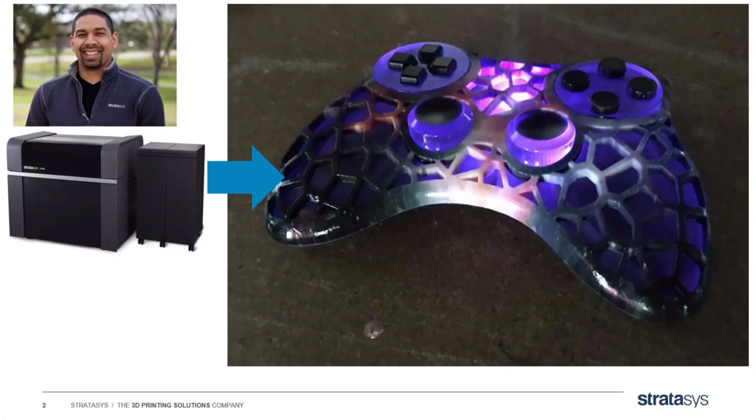So my job at Stratasys is when people get their new advanced multicolor machines, I go in, I'm with the software team, and I help them make sure they can get the output, the realistic prototype output they want out of those machines. So I help them get that end result. But every time I'm in, helping people set up their processes and going through, they always ask me the same question. They ask me, how realistic can my 3D printed parts get? They ask me, what's the most realistic part we can print? And sometimes this is the wrong question.

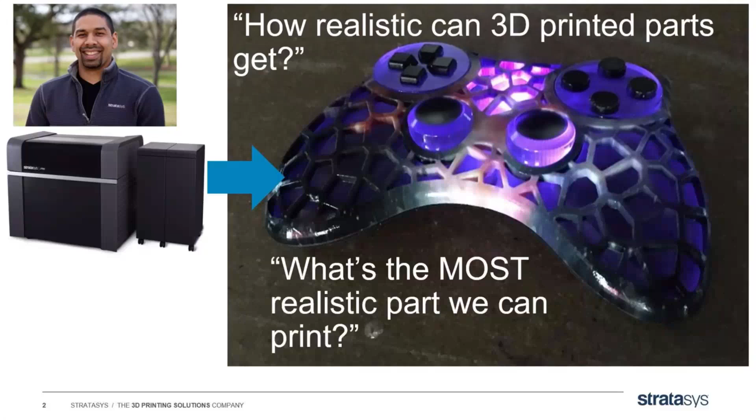Because here's my first rule: the only reason to 3D print a prototype is to make a design decision. And typically, it's your very next design decision. So the question I ask folks when they want to decide what to print is: is this print realistic enough to make your very next design decision?

And that leads to kind of a gradated levels of 3D printing, which I'm going to go through here. So imagine you guys were a small, industrial design firm, and you're trying to come up with a design for the next new hot game controller, like a PlayStation controller, an Xbox controller. You want to leapfrog ahead, and you need to pitch this idea to someone like Sony or Xbox or something like that.

Everything I'm going to go over here, I've written a tutorial on earlier on, so if I'm going too fast here, don't worry about it. It's all written down on the web. Go to GrabCAD.com, you can search for the tutorial. If you go to Google, just Google how to 3D print realistic prototypes, and I'm the first video that comes up. So don't worry about taking detailed notes. All the little steps and tricks are recorded online for you at any time. And also, Javelin is recording this, so you can always play it back again.

But let's go back to that design firm. Okay, so you're trying to come up with the next new video game controller prototype. You've got some ideas. And what I'm using as inspiration are my own PlayStation controllers from home. So this is what they look like from home. This is what we're going to try and get and go beyond.

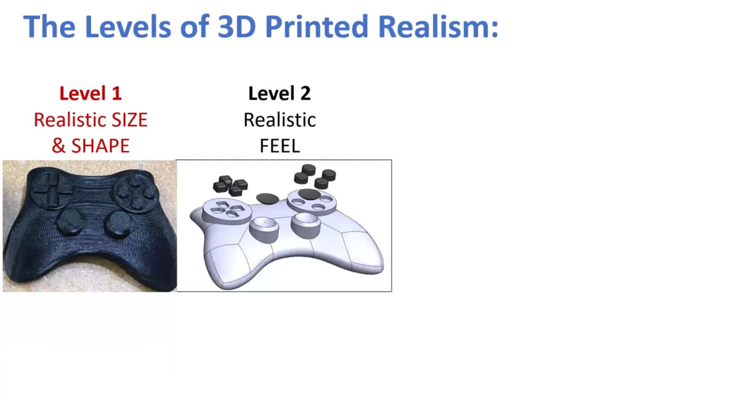Going one level higher, now you've got realistic feel. You can see we're going to do stuff with those buttons. We're going to make those buttons soft as we make the rest of the print out of a hard plastic, and we'll make them feel like buttons, get a realistic feel. Going even higher, we're going to add colors. Okay, now you're going to talk about matching the right color, Pantones, things like that.

That's a higher level of effort and result. Going even one level higher, I call it realistic everything else. Each of these levels is a quantum jump in effort and realism.

What do I mean by that? In the first level, what do you need to make this happen? You just need a CAD file and any kind of printer. I put FDM printer here because that's what I'm using, but really any printer will work. You're just trying to get the shape of the thing.

Going to level 2, now you have to add a PolyJet printer. You have to print in multiple materials, a hard and a soft material at the same time, and have them fuse together during the print. So now you need a multi-headed printer.

Going to level 3, now you need some sort of software that outputs color. VRML, OBJ, the new format 3MF. Now you need a software that can do that, not just a CAD software maybe.

Going one level even higher, now you're adding magnets and light and polish and even cornstarch. I'll talk about the cornstarch later. But you're going, again, another level of effort, another level of time.

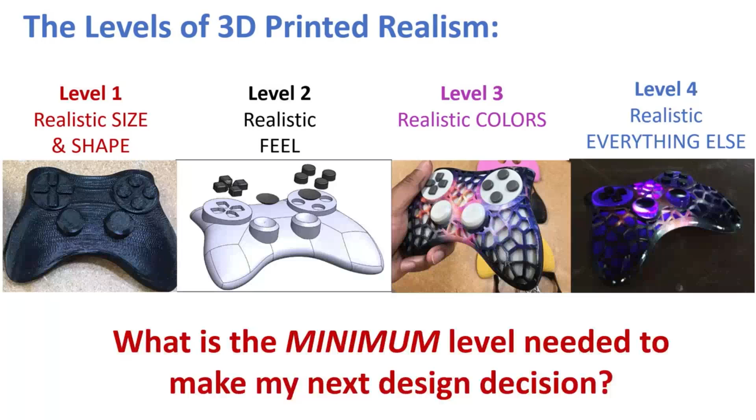So as you're going through and designing your consumer product parts, you have to ask yourself, what's the minimum level you need to make your next design decision? That'll make you efficient and that'll save your time. All right, so let's go through these different levels. You guys ready?

Level 1, size and shape. When I started out, I used SolidWorks. You can use any sort of CAD system for this. I'm a SolidWorks person, I've been trained in SolidWorks for 10 years. So I made this model quickly in SolidWorks in 10 minutes.

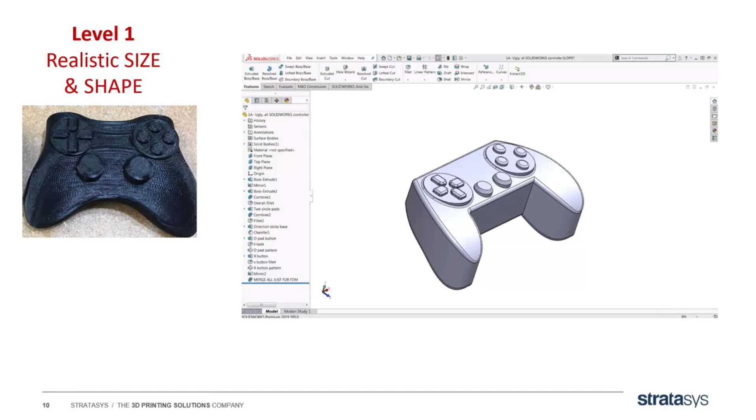This looks like the old Nintendo controllers we had when we were a kid. It looks pretty good on screen, looks like my hands would fit around it, right? But the instant you print it out and pull it off the tray, you can tell this is a bad fit. It just feels clunky in your hand, it hurts, it doesn't fit right. You can tell within 2 seconds of holding it, this is a bad design.

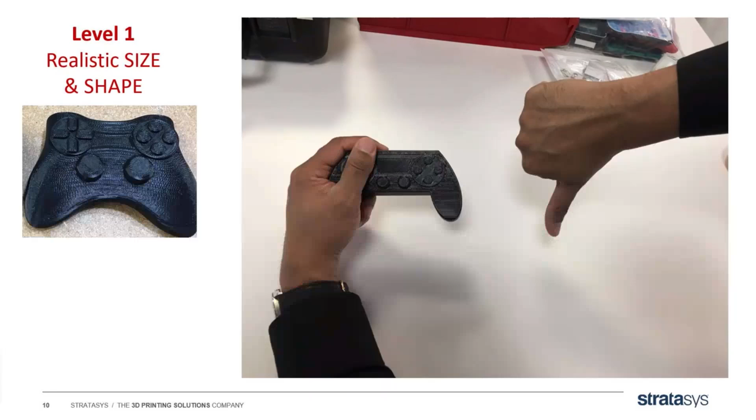So I went back to SolidWorks, and now I used the power surfacing feature. If you guys aren't using the power surfacing add-in, it's a great little add-in for consumer product design. It lets you do sub-D modeling and then add your SolidWorks mechanical features after that.

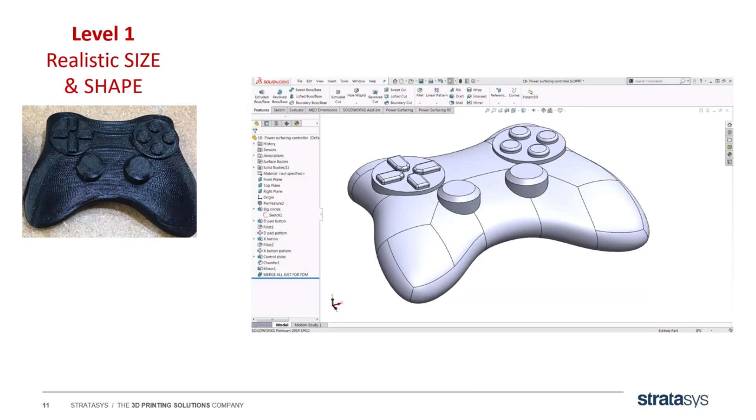So I did some sub-D modeling. I came up with this, and when you print that out, you can see, if you can see in the little tiny screen here, it fits really, really well. It cups to your hand, the buttons are all in the right place, it's exactly the right size. So this one works, and you can find that out within 4 seconds of holding the print.

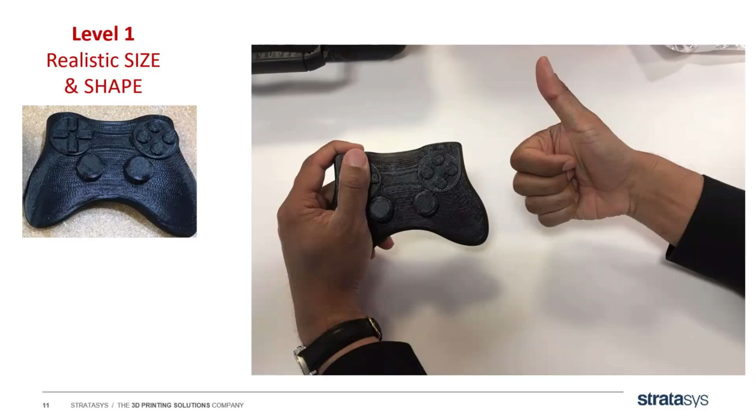But here's the trick for level 1. I didn't print one version and then the second version, I printed them both on the tray at the same time. And that's my rule for level 1: print more than one size and shape at the same time.

You don't want to do these in series, wait 3 hours, make a decision, wait 3 hours, make a decision. You want to do these in parallel, okay? That's more efficient, it won't affect the print time that much. An overnight print is an overnight print, and it will let you make a bunch of decisions really fast. You can tell what's not going to work right away.

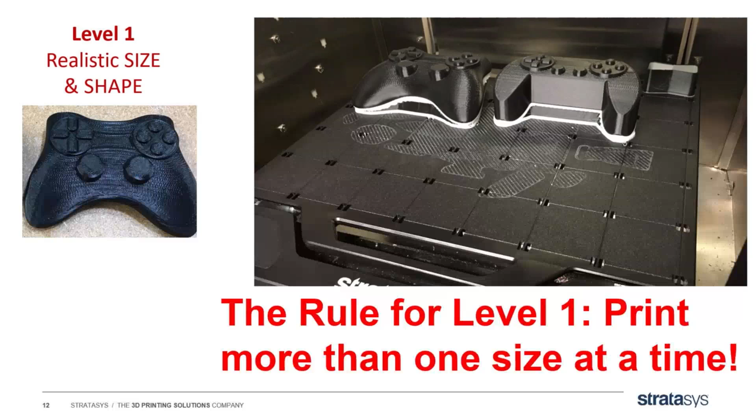Previously, I was printing out a cell phone idea. We had an idea that if you put bumps on the back of a cell phone, you could kind of hold it better for gaming, kind of like those pop sockets that people use.

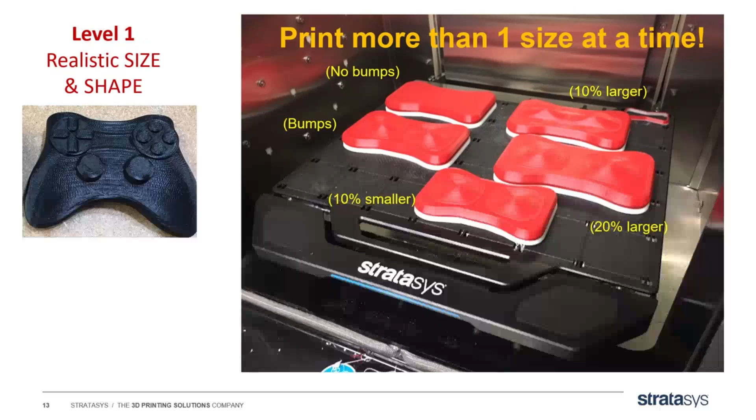So that's my rule for level 1. You're trying to figure out the size and shape of your part, just the general outline. Just, will this idea work? Print more than one size and shape at a time. It doesn't really affect the print time, and it really cuts down your design time.

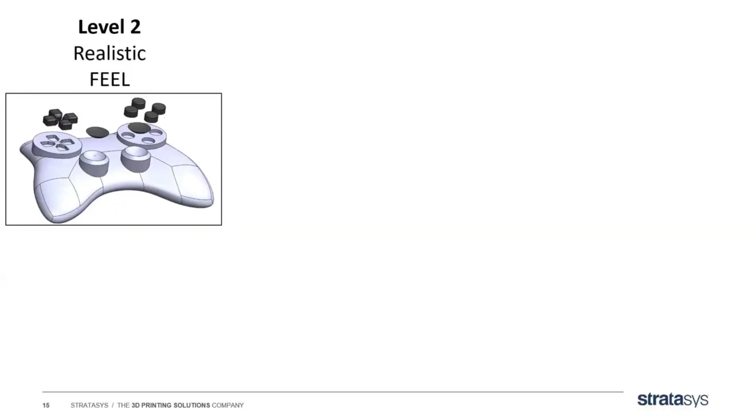Now we're going to go a little bit higher and go to realistic feel. So this is an image I stole from Teknor Apex. You can see their website down below. It talks about shore hardness. Some of you guys may be familiar with it, some may not.

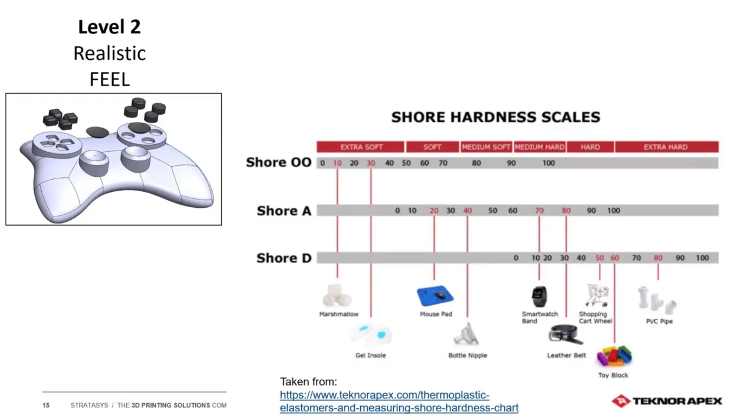For our PolyJet machines, we have colors called Vero. Vero is our brand name, and those Vero colors are about shore 80 or shore 80D, so they're about as hard as a PVC pipe. We also have white and black, which are pretty hard. But we also have colors called Agilus, and Agilus are shore 30A. We have white, black, and clear. Pretty soft, between a mouse pad and a bottle nipple.

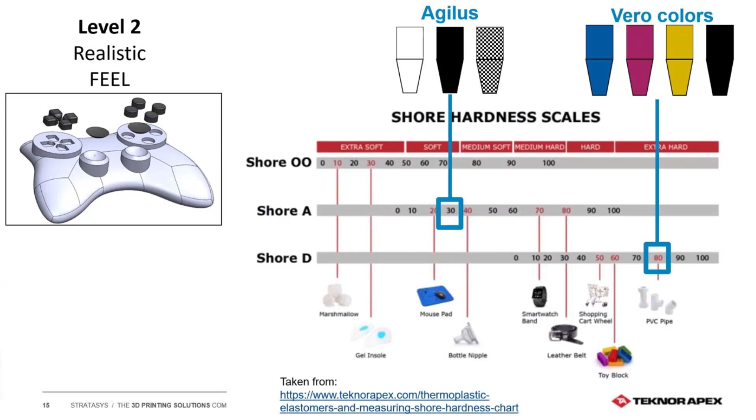So one way to approach level 2 is, for this controller, you're going to print the buttons in shore 30A, nice and soft, and print the body in shore 85D. That's the very basic level of feel. You make it a multi-body in SolidWorks. The bodies just have to touch. There's no special thing you have to do with the PolyJet printer. As long as the bodies touch face to face, they'll bond during the printing process. But this is the very basic level.

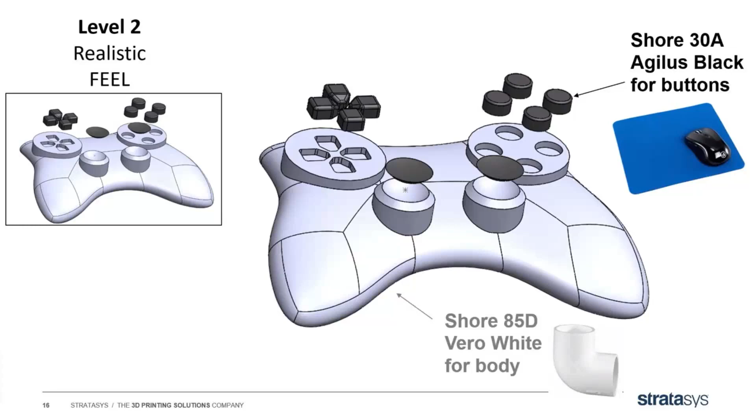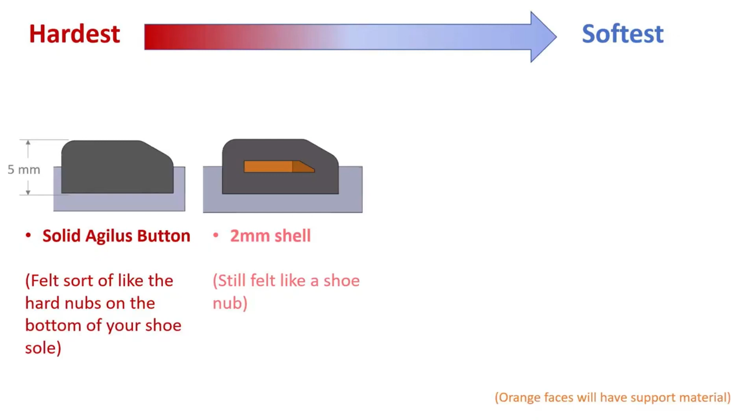One of these tricks is they make the part hollow. This is a shell feature in SolidWorks, just a simple 2 millimeter shell. Anything that's orange will have support material on the inside, and we don't have to wash the support material out. The support material makes it squishy, so that's a little bit softer. It still feels like a shoe.

But if you make a 1 millimeter shell, this feels soft when you give it a firm push. It feels pretty good. And then you have the unsupported shell. This is really soft, feels like the nub on a stylus, very flimsy, right? So you can dial in, you have that one shore hardness, but you can dial in what you're doing to make it feel harder or softer.

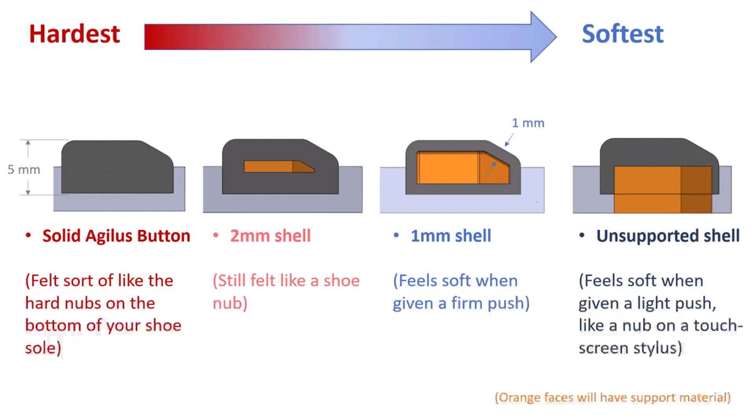So just like level 1, you don't print just one of these at a time. I did a 1-hour test print, and you print a bunch. Here's some solid buttons, here's some different hollow buttons, some unsupported buttons. I just want to see what they feel like. Again, we're testing ideas, we're trying to find out what doesn't work.

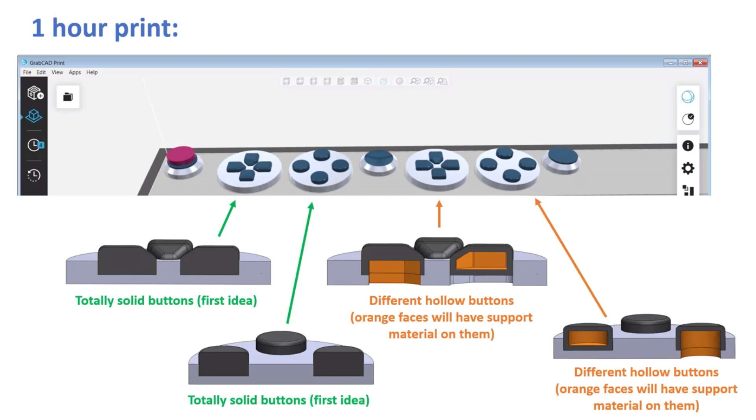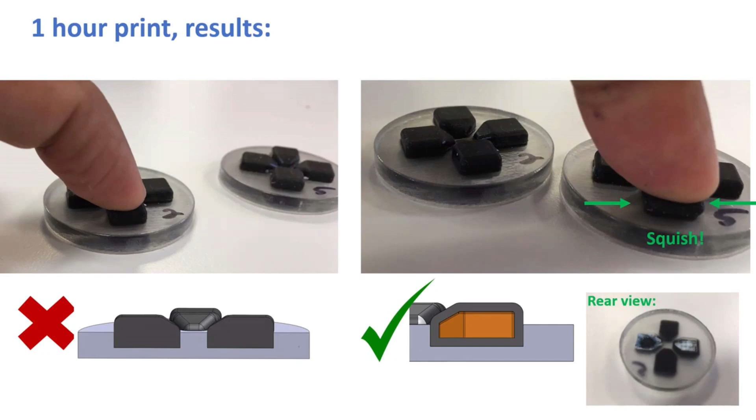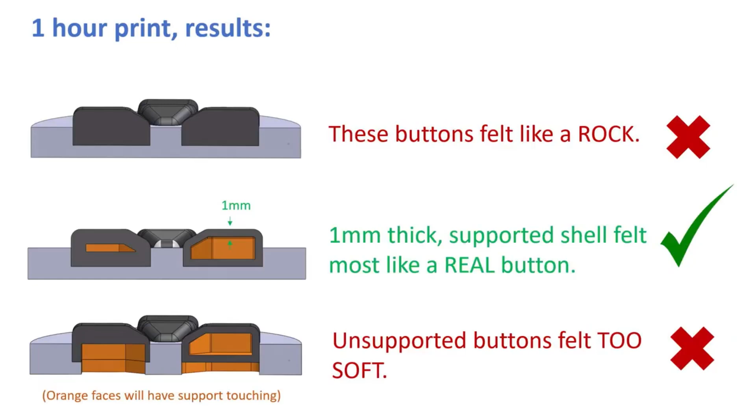So here's the results. The solid buttons, like I said, felt like a rock, no squish. But the hollow buttons with the 1 millimeter shell, they felt like a squish, and they felt like a real button. You can see the rear view, the support material on the back there, the unsupported ones. So here's the results: too hard, too soft, but this in the middle is the Goldilocks zone, right? For the application I'm doing, it felt most like a real button to me.

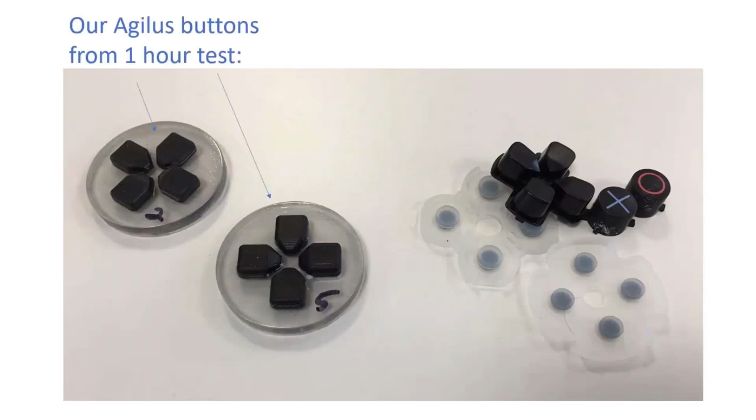And why are we doing this? Because if you look at the buttons we printed on the left, here's what we actually printed in the 1-hour test, but here's what the actual controller looks like. I bought a used controller and took it apart to show what it looks like. In the actual controller, you've got hard plastic buttons over a very thin rubber spring, less than 1 millimeter thickness spring.

But my buttons are relatively thick, so I didn't try to match one for one the exact geometry of what's going on. We're using a different process, a different style of printing, a different CAD file, but I just had to have something that felt close.

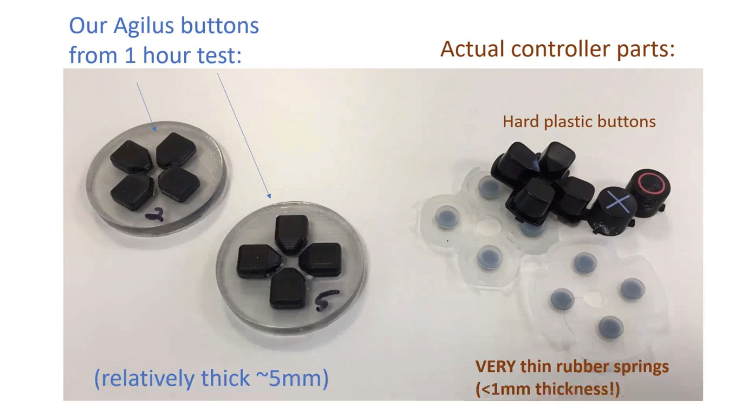So I tested it in a little one-hour print. Then I printed an actual one, and it felt pretty good. Here's the actual one right here in the corner of my screen.

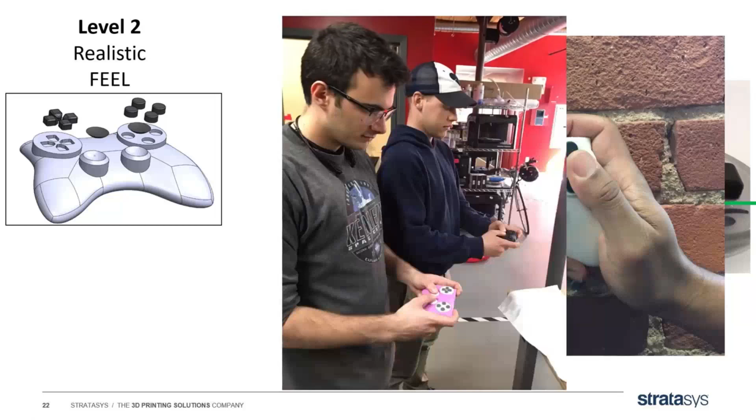And then I had live testing. One of my coworkers said, man, this feels close enough to test. My other coworker said, this is better than the one I have at home.

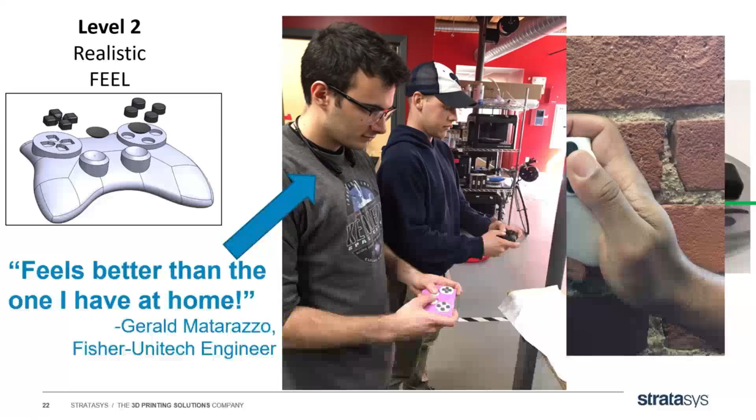So you can dial in this feel based on some tricks with geometry and infill. That's my rule for level 2: it doesn't have to be exactly real to feel real enough. The buttons as they are, real enough to take to someone and say, look, this is the next control we want to make, do you like it? That's enough to get it past that executive. We don't have to go all the way and make tiny springs over hard buttons.

You could if you wanted to, but you're trying to do things fast. You're trying to be the first to market. Try and just test out this idea.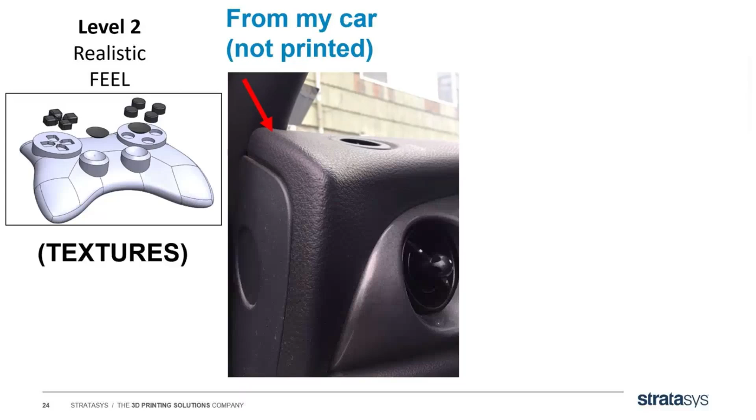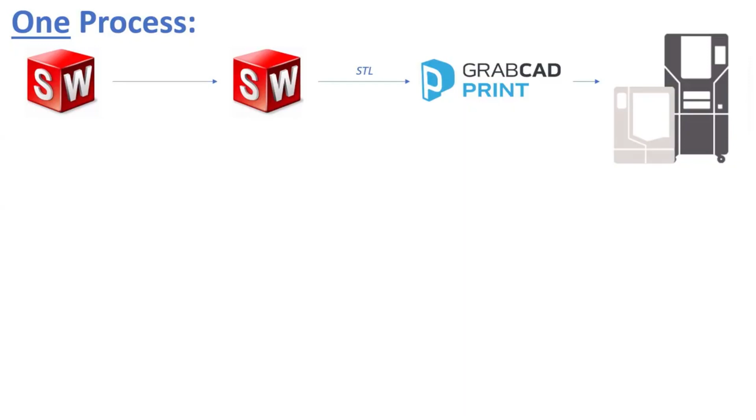So I made a similar part in CAD. Again, I love using SolidWorks. Here's one way to put textures -- lots of other programs have different ways. You can do it in Photoshop, in Rhino, in 3-Matic. Here's one process: I put different faces in SolidWorks, isolating them using the split face command.

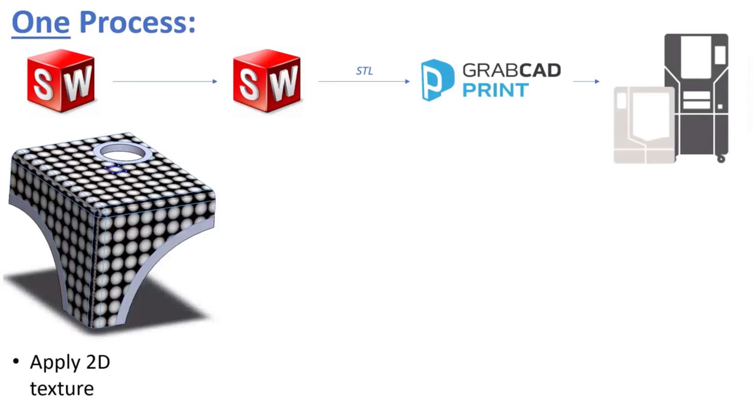I applied a 2D texture, just a black and white texture, and then applied a 3D texture in SolidWorks. This is a feature new in 2019 -- it lets you actually bump and displace the part and make an STL out of it. You lay it out in GrabCAD just like you normally would, and when you print it, that's the result.

The picture in SolidWorks shows circular textures -- that was an earlier version. The red picture is actually hexagons; it was my third or fourth iteration. It came out really well -- the texture wraps around the fillets. It feels really nice, makes it look very realistic and not like a 3D printed part. So that's the one I'm showing here.

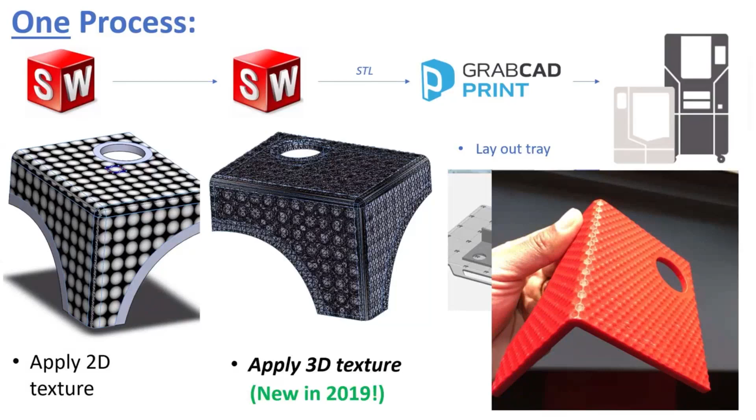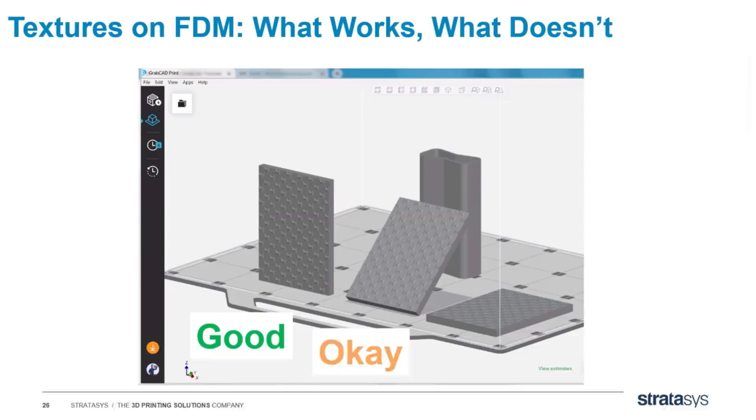Some tips on doing textures -- this is for FDM really. What works and what doesn't: if you have textures on a vertical surface, they work really well. Textures on an angled surface depend on the angle. Textures on a horizontal surface are the worst -- they don't work at all.

Here's what it looks like when printed -- this is a little bow tie texture. On the vertical surface you can see we have lots of layers, actually 10 layers of information for each bow tie. I'm printing at a 10 thousandths of an inch layer height, and the bow ties are 100 thousandths of an inch, so you have 10 layers to capture that information.

Lots of fine detail. But on the worst version, you only have 2 layers -- the bow ties are only 2 layers high. So now you can see it just does not capture the intent at all.

This happens mainly in FDM. You don't have to worry about this so much in PolyJet -- the layer height is 10 times finer, so you don't see this so much in PolyJet. But if you're doing this in FDM, watch out, and make sure you print textures on vertical surfaces.

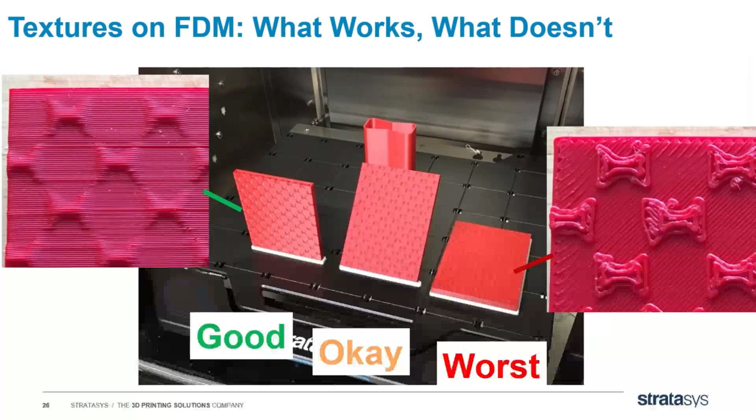So that was me using SolidWorks to apply textures. Like I said, you can also use Rhino. This is me printing out a version of the moon -- the black lava plains are flat, the white mountains are raised.

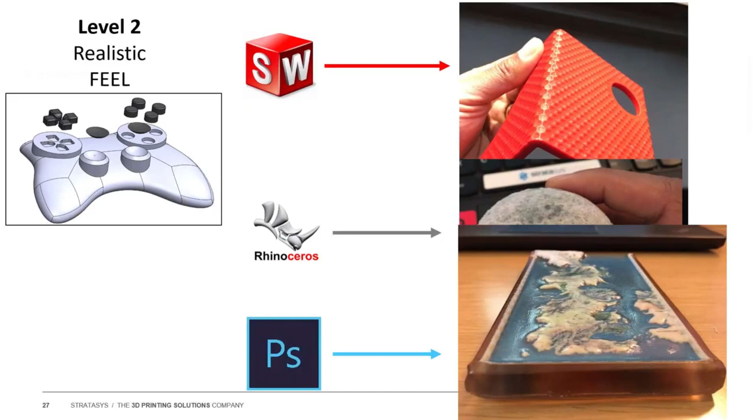You can also do this in Photoshop. This is me printing out Westeros, from Game of Thrones. I started with just a gray rectangular slab in Photoshop, put the map on there and bumped it. The blue areas stayed low, they were the seas. The light colored areas raised up. So I'm not going to go through and model every single island in Photoshop or in CAD, I'm going to let Photoshop do that for me. You can bump things out a lot of different ways.

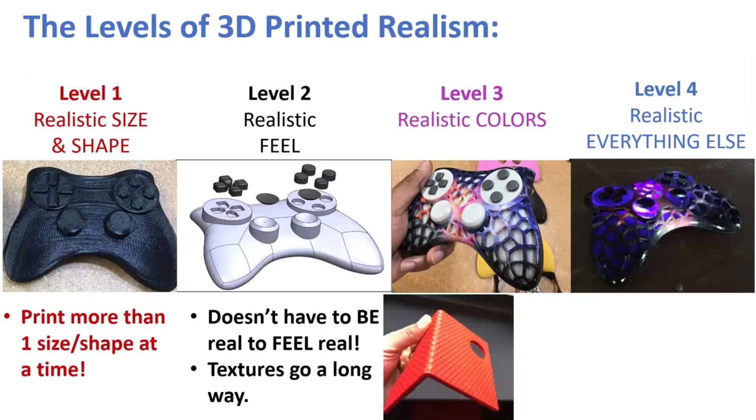Okay, so that's level 2, realistic feel. The tip here is it doesn't have to be real to feel real. Think of how we fake those buttons and fake the softness of the buttons. Also, textures go a long way. There's just something about textures that fool the eye. These repeating textures fool the eye, fool the fingers. It doesn't look like a 3D printed part anymore, it looks really realistic. So if you want to jump up your level 2 game, add some textures to it. Lots of different ways to add textures.

Before we get into level 3, I'm going to put a big intermission here, and we're going to talk about modular design. This is going to be important in how we apply colors. Again, if you guys have any questions, feel free to interrupt me on the chat. But we're going to talk about modular design here before we jump to level 3.

What do I mean by modular design? Modular design means you have a common middle, and then you have a top that can come off like this, and a bottom that can come off. We actually learned this trick from architects. Architects use this to put facades on their 3D printed buildings. The middle is the thick, beefy part. It takes 8 hours to print some of these architectural buildings, but the facade is very thin, it only takes an hour to print. So if you design your part so the top and bottom come off, you can switch out these facades and swap out for any different color you want, and don't have to print the 8-hour thing again. You can just print a 1-hour facade.

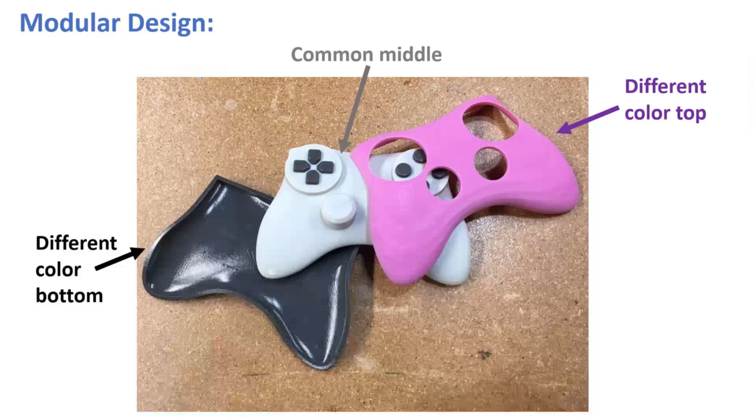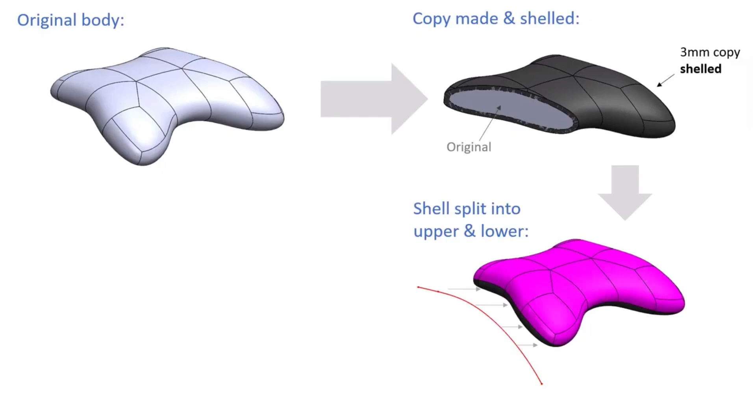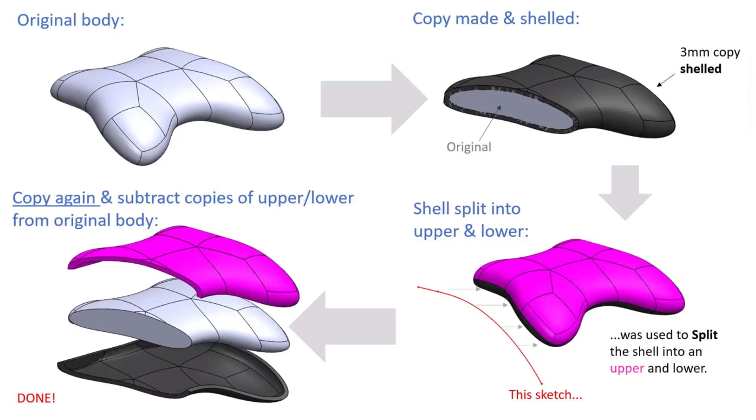How do you do it? I'll show you in SolidWorks. You start off with the original body, you make a copy of it. The black is the copy, and then you shell it out. The original body is still gray. You split it into an upper and a lower, again using a sketch to split the part. So now you've got an upper, which is purple, and a lower, which is black. And then finally, you make a copy again of the upper and lower and subtract those from the original body. So now everything will fit together like a glove, there's no overlapping volumes.

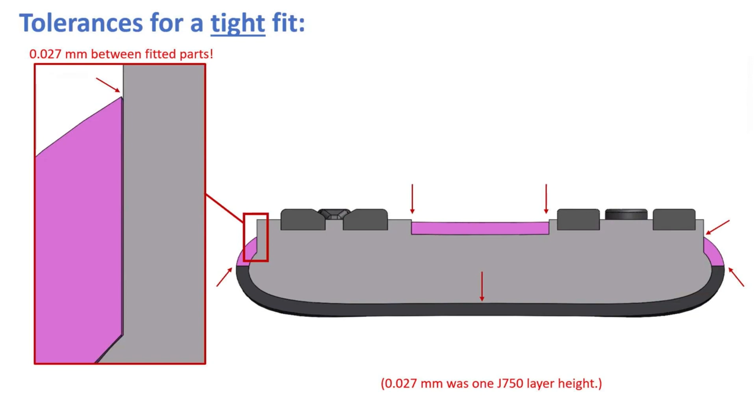How tightly do you make them fit together? Typically, the rule for any kind of 3D printed thing is you leave 1 layer height between parts that have to fit together. In the J750, our layer height was 27 microns, so I left 27 microns between the parts, every place you see a red arrow. I went through in SolidWorks, did some cutting, just left some space. This was a very tight fit, I had to actually do a lot of sanding between the top and bottom part to get this to fit. So 27 microns, 1 layer height, is a very tight fit. If you want it a little easier, maybe do 2 layer heights, but that's a good rule of thumb — leave 1 layer height of thickness at least, and go up from there.

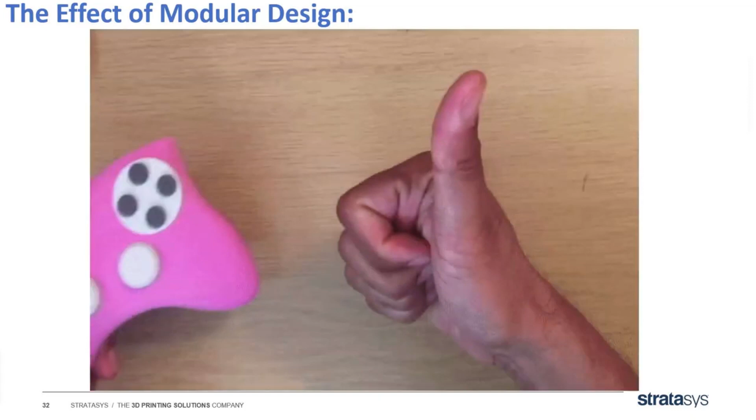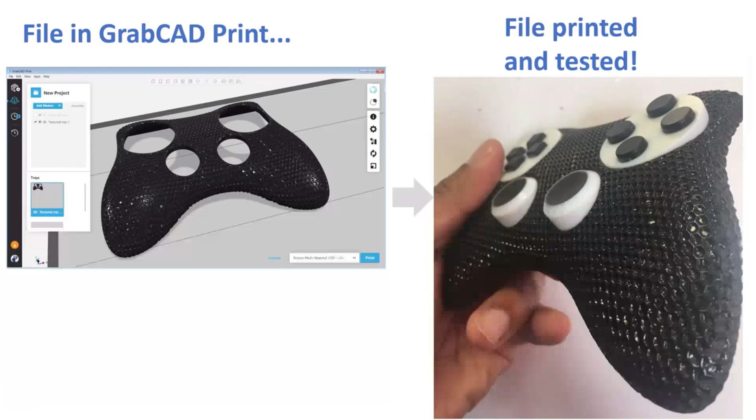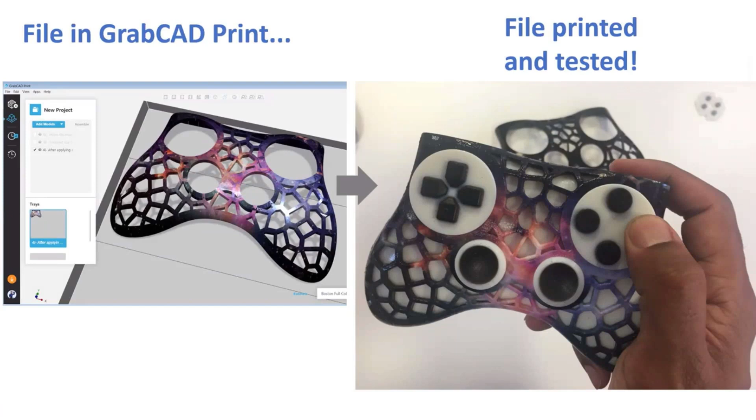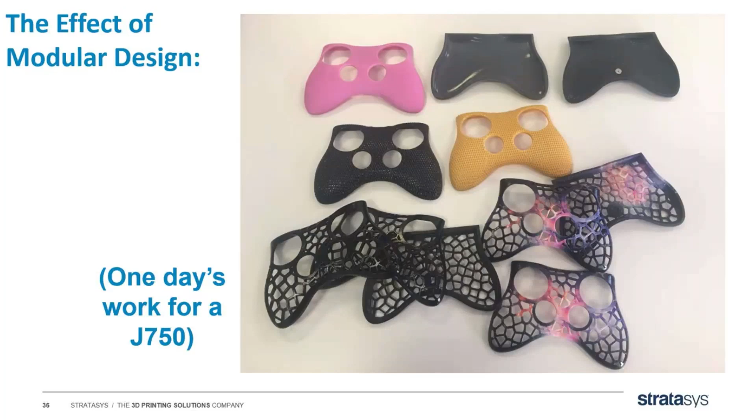I can make a colorful facade, put it in GrabCAD, and test it in an hour. This wouldn't have been possible if I was printing the whole body over and over again. This is one day's work for a J750. You can put all these parts, print them overnight because they're really thin, and they'll be done when you come in the morning. Think about each of these taking 8 hours instead because it's printing the whole controller. It's crazy. So this is the benefit of modular design. It opens up so many possibilities for color studies.

So now having talked about modular design, let's talk about how to do those actual colors. To do colors, you need some sort of software that can output a VRML, a WRL file, an OBJ, or a 3MF. 3MF is the newest and most modern. OBJ is kind of a wider standard. VRML is a very old standard. But what softwares can do this?

Well, the first one I learned was Photoshop. You can actually take those 3D files into Photoshop, put a logo or a texture on there. This works great for flat faces, for very sharp logos, your company name. I would probably use Photoshop on something like that.

Rhino is good for wrapping things around. So if you wrap around all the different surfaces of a body, if it's multi-body, if it's very complex, I'd probably use Rhino. But oddly enough, a dark horse in this is SolidWorks. SolidWorks just recently added 3MF support. We recently added support to import the 3MFs. So SolidWorks is actually a surprising entry in this.

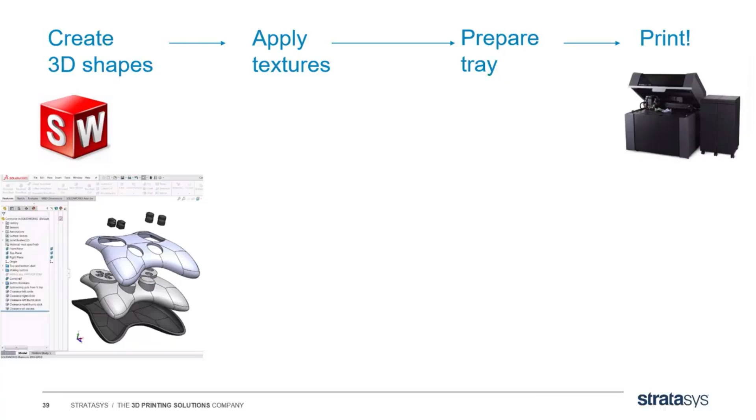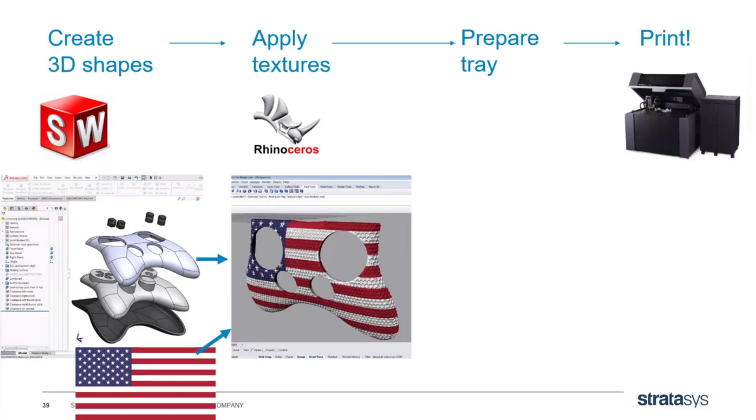This is how it would look in Rhino. I make the shapes in SolidWorks so you can see my modular design. I add an American flag JPEG, and I put it all in Rhino. So I bumped it in SolidWorks, I put the flag on in Rhino because you can't put a flag or a texture on an STL file in SolidWorks—it doesn't work there, but it'll work in Rhino. You put it on a tray in GrabCAD print, and you print it out.

Another facade, you can easily test it. That's how I used to do it before the start of this year. Now, if I'm working with a non-bumped, non-texture design, I just go to SolidWorks and I export a 3MF. Super easy, just one click, save as, export, and everything's zipped up for you. So this is really my easiest path now.

You can see I've got multi-bodies in SolidWorks. The different blue buttons are blue. I've got a face texture, which is the map. This is my easiest path now.

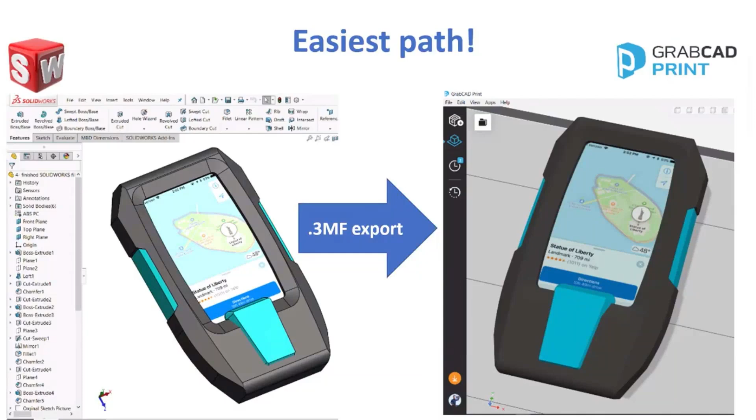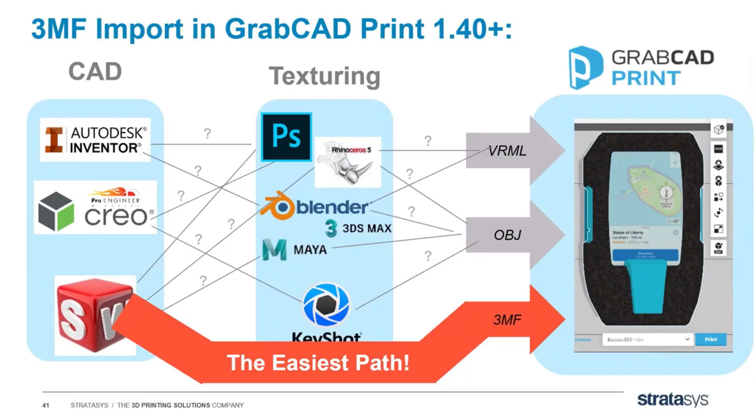Oh wow, okay awesome, cool. All right, we're gonna get through this. So lots of different ways to do CAD and texturing and to get to VRMLs and OBJs, but like I said, this is my easiest path now. So you guys are learning about SolidWorks 2021. I think this is perfect—try this if you're using a color printer.

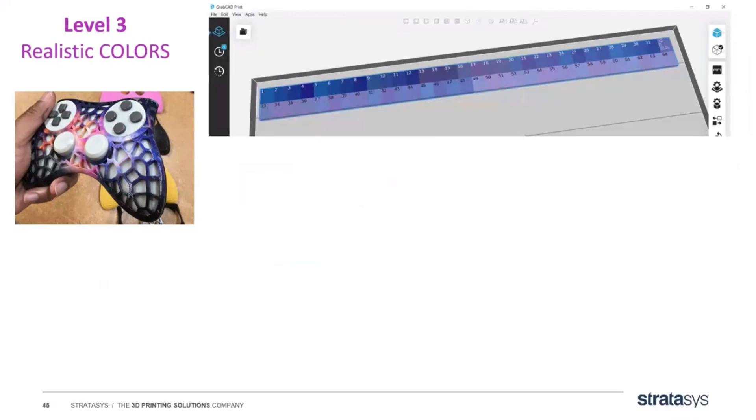All right, so talking one last time about realistic colors. If you don't know what color to print, we have a swatch tool inside GrabCAD print. You put your target color, you put some sort of radius around it, and you can print out a swatch which shows you what those different colors will look like on the tray. And when you actually print it out, you can go to your client and say, do you want this color or do you want this color?

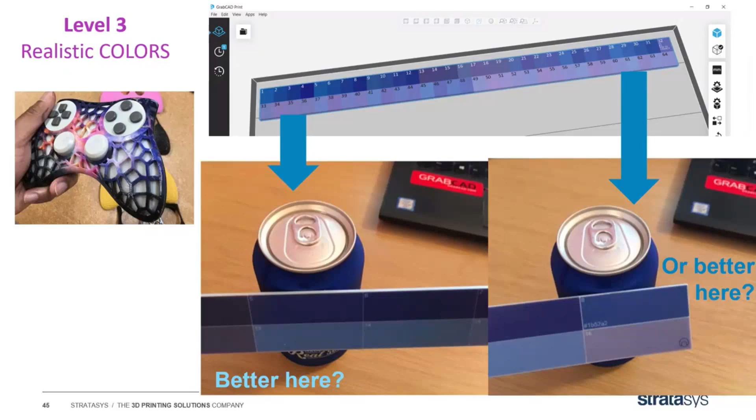I'm trying to match the color of a Pepsi can right here. So you can have the client circle which color they want, because things printed out are different from how they look on the screen. RGB on the screen is different from CMYK on the print—one is additive, one is subtractive. So if your client can circle what color they want, that'll help you figure it out.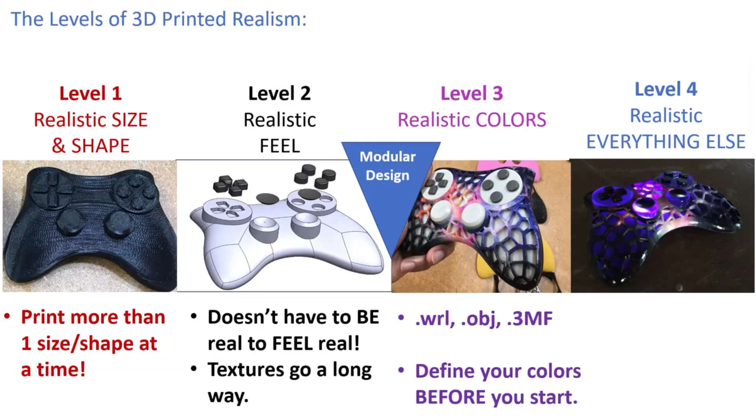Okay, last one. We've got about 2 or 3 minutes left. Let's talk about everything else.

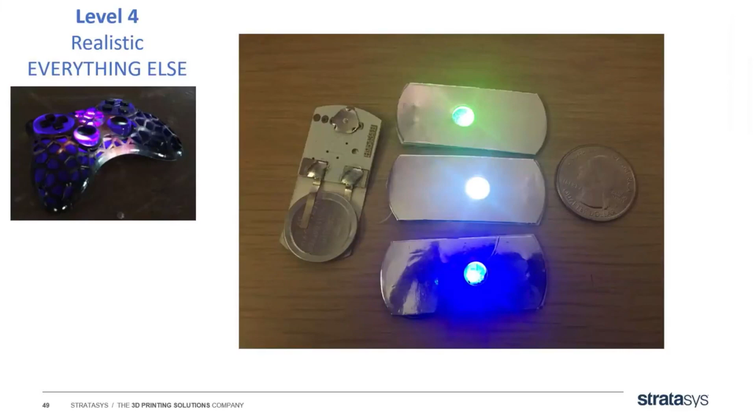Okay, you want your parts to light up from the inside? You can buy these lights on Amazon, really small, and put them inside your part. That's what I did for the controller. You can even put weight-reducing pockets on the inside if the part weighs too much, and you can even put magnets on the inside to make them snap together.

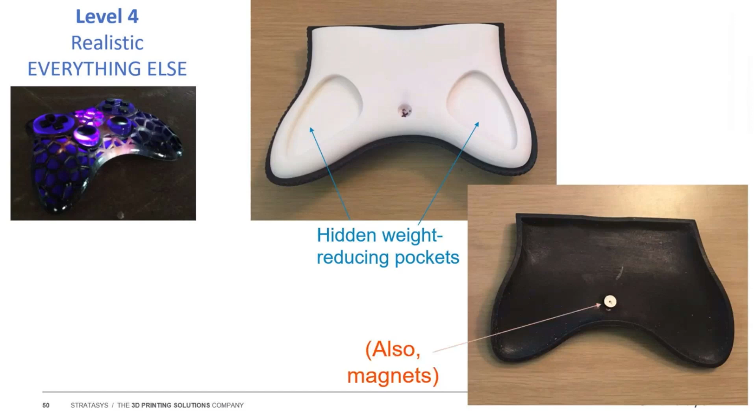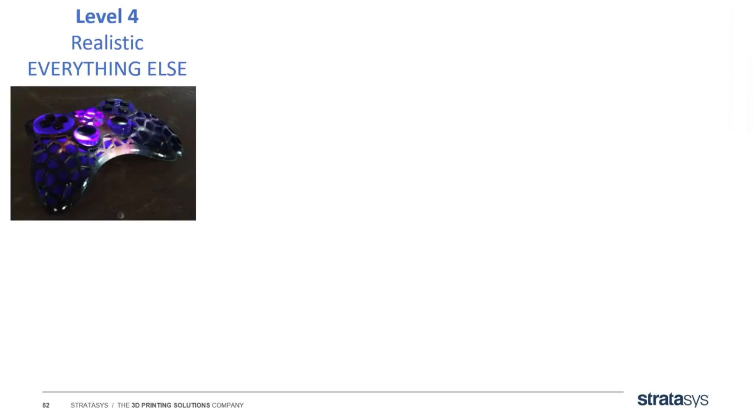And finally, I was talking about the cornstarch. If you've ever used Agilus before, it's a little bit sticky, kind of like leather, right? But buttons are supposed to be smooth. So what did I do to make the Agilus smooth? I actually brushed on cornstarch. This is a trick someone at the office told me. The light layer of cornstarch makes the buttons less sticky, it makes them feel more like plastic.

So the things I do for you guys to prove this out. That's how I got to this print, and it's probably the most realistic print I've done. A lot of people couldn't tell a difference between a real controller and it, but it definitely took a lot of work to get there.

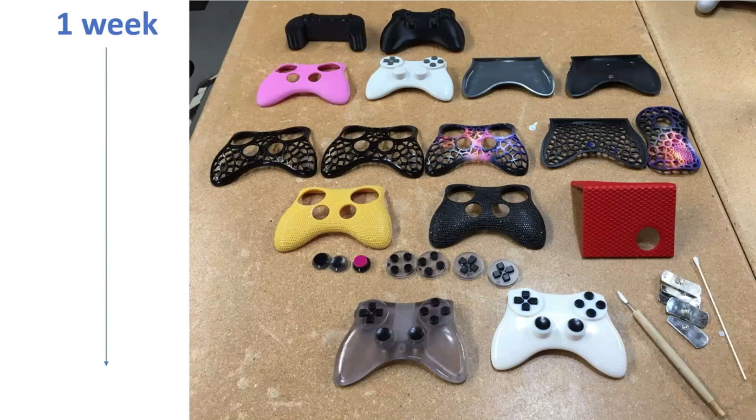And maybe all that work isn't appropriate when you're just trying to find the shape or the idea of your controller first off, okay? But the point is to do the work really fast. This is all 1 week of work. You can see I started off with a very coarse design, went to modular, started adding some colors and some textures, and tested the buttons. This is just 1 week. I can make more models in a week now with a printer than I could in a month using other methods. You want to test those designs out really fast.

So wrapping up now, everything I've shown you is on GrabCAD.com. I've made different tutorials about how to match color, how to make texture, prototypes, all there.

And we'll talk about the levels of 3D printing one last time. Okay, the very first level, you're looking at basic CAD. You're just trying to see if things fit. But then you go higher.

Now you're dealing with shore values and Agilus. Now you're dealing with the hollow tricks on the buttons. You're dealing with texturing programs. It's more of an effort.

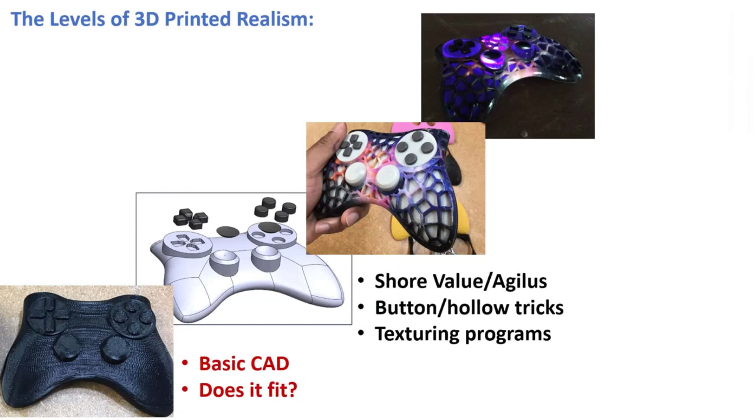If you want to go higher, I'm going to put a wedge in there. Think about modular design. Now you have to do advanced CAD to get those facades, a little bit of copying and splitting.

Going higher to level 3, now you have to deal with WRLs, OBJs, 3MF, the RGB to CMYK problem, Pantones, UV mapping. These are all problems that come up at level 3. Sometimes it's worth it, sometimes it's not.

And then going to level 4, now you're talking about post-processing and really model making, polishing. It's a lot of non-3D printing skill. But if you really want to get that highest level of realism, that's where you have to go. It's a lot of work there, but sometimes you get the most beautiful models that way.

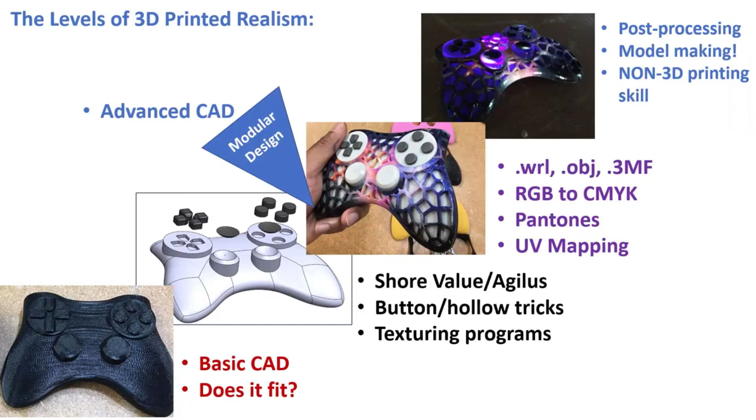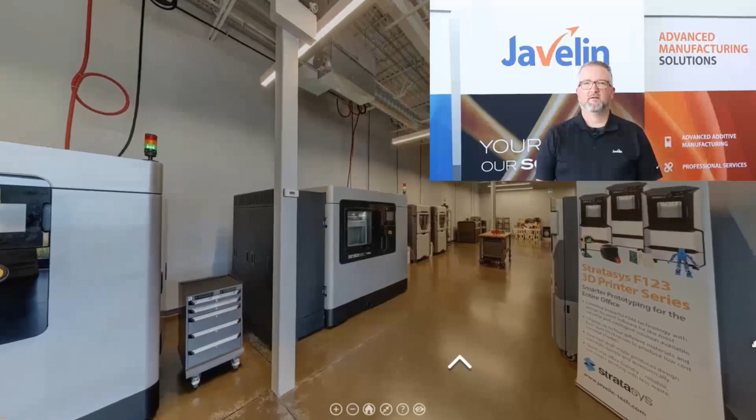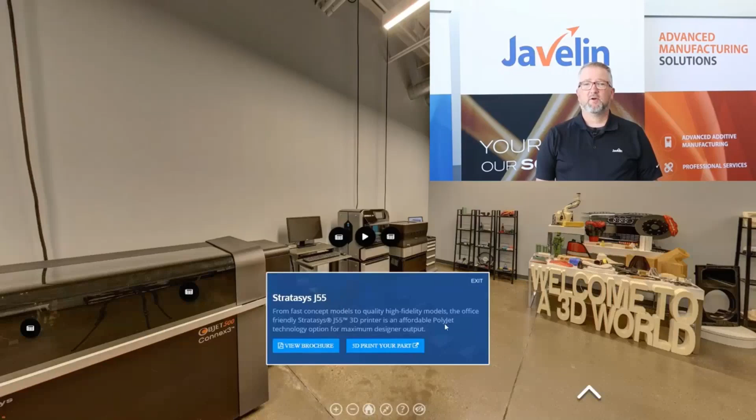Welcome to Javelin's Additive Manufacturing Center, or AMC as we like to call it, located in Oakville, Ontario. This 3,000 square foot facility has both metal and plastic 3D printers, as well as post-processing systems, Artec scanners, and universal laser machines. Our systems are constantly at work fulfilling service orders managed by our professional services team. Click on the hotspots to look around and learn more about the hardware and services we offer in our AMC. If you have any questions or would like to learn more, do not hesitate to reach out for more information.